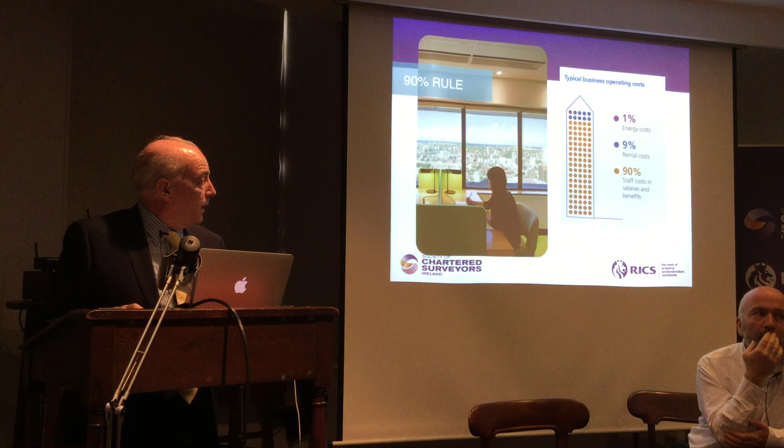One example there is that 90% of the expenses in running a business, particularly an office building, for example, are related to staff costs, salaries and benefits. So if you save 10% there, it results in far better economic savings than say 10% of such energy costs.

So there's just a few interesting research findings that speak for themselves. Office workers with windows perform better, they have better night's sleep. Productivity improvements 8 to 11% are common as a result of better air quality, and a view of trees rather than concrete also results in increased productivity.

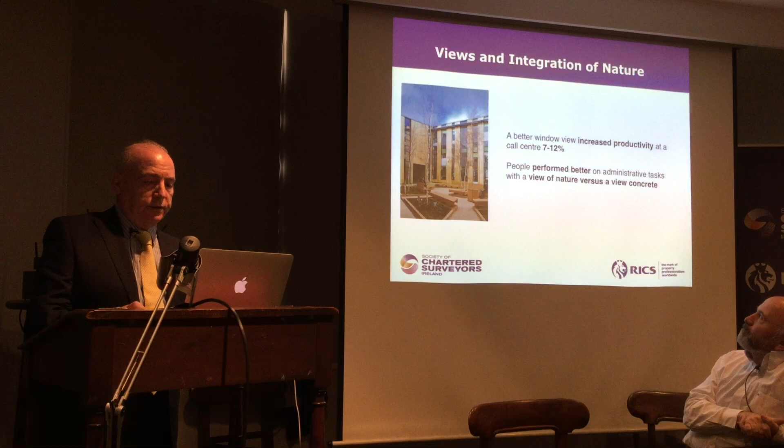So that was then summarised into basically, and this is what we're finding now in the delivery of the modern buildings that are being finished off, office buildings now that are being finished off, is that they have a higher sort of rate of delivery in terms of these under these headings.

So how to go green? Well, as we just said there, it's good for health. There is a legislative imperative now which is probably go into greater detail. So it is coming down. We're going to have to deal with it. It's sustainable. It's cost saving.

The staff productivity improvements. So I presume in time, we'll be speaking more green language terms, and also for investors there's a better return. So these are the terms that we've used, or that we've become familiar with, which again Pat will bring you up to date with more during his talk. So that's basically it.

It is my great pleasure to introduce Pat Berry. He's Chief Executive Officer of the Irish Green Building Council, which he co-founded in 2010. He is an architect with over 20 years of experience in Ireland, Europe and South America. He has a Master's in Environmental Design of Buildings from the University of Cardiff and is a qualified passive house DGNB consultant. So it's a great pleasure to be here.

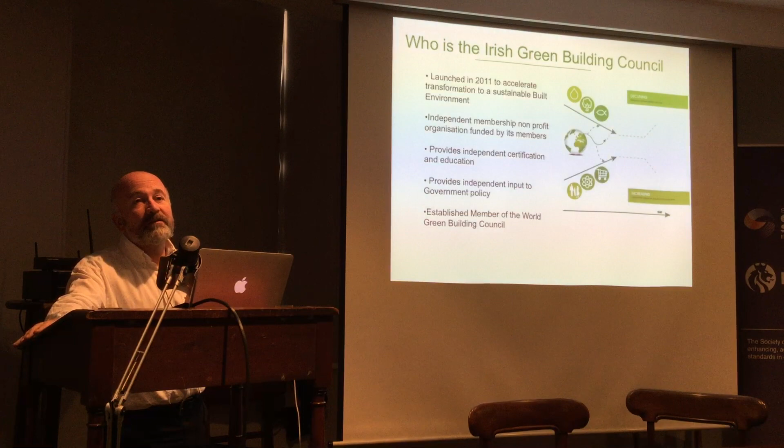I'm just going to give you a brief introduction to the Irish Green Building Council. We launched in 2011, and we're a membership organisation. Our intent was really to provide metrics for the construction industry to measure sustainability. So we provide independent certification, we provide independent input into government policy around things like helping develop the national renovation strategy, and we're an established member of the World Green Building Council, which is a network of green building councils around the world.

So you'll have heard of the US Green Building Council, UK Green Building Council, Australia. They're all very influential in their own markets, and they each do slightly different things. The UK Green Building Council will be more focused on policy intervention and education. The US Green Building Council is fully focused on its LEED rating system. Similarly, Australia will be very focused on their Green Star rating system. We do a bit of both. We do a bit of all of those things, because in a small country, we only have one organisation that's focused on green building.

We've a very broad membership, which takes in everybody from larger developers, the likes of Hammerson, or building owners like Google, right through all of the professional organisations, the RIAI, the Society of Chartered Surveyors. So pretty much everybody in the entire value chain is involved with the Green Building Council. And we're always looking for new members, by the way, to help us do what we do.

We're fully funded by our members, and with that funding we're able to go on then and apply for funding to do other projects like build upon or develop rating systems. So what we're going to talk about today is only a small subset of what we do.

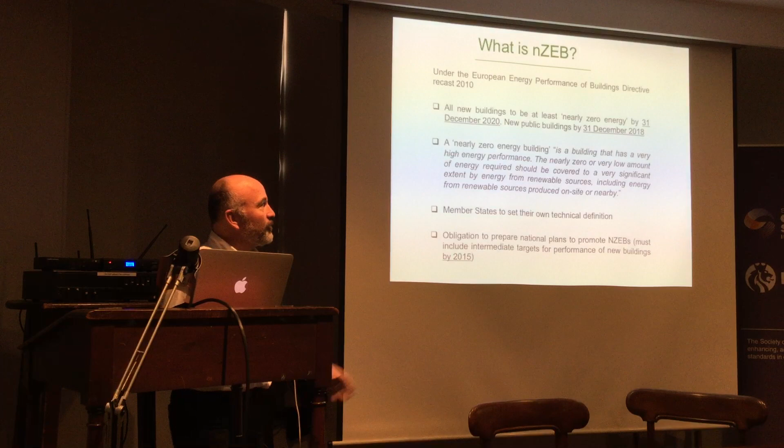It comes from the Energy Performance of Buildings Directive. The Energy Performance of Building Directive is that great directive that keeps on giving. It gave us the BERs. It was recast in 2010, and in 2010 it introduced the requirement that all member states should, by end of 2020, have all their new buildings be nearly zero energy buildings.

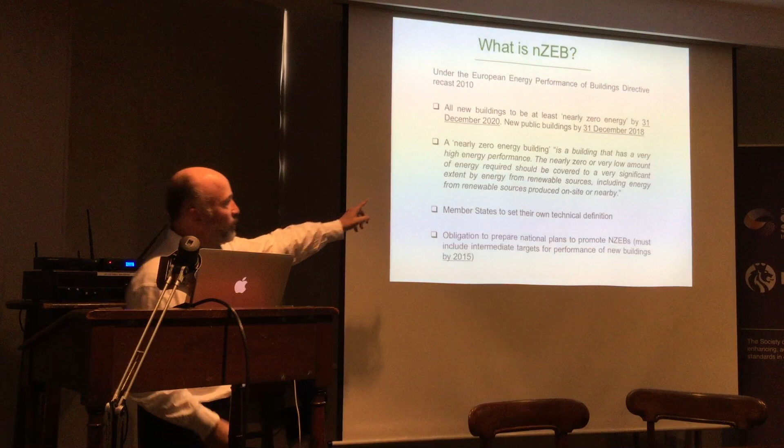So a nearly zero energy building is a building that has a very high energy performance, the nearly zero or very low amount of energy that still is required to meet for building function. A substantial part, a very significant extent of that energy should be met by renewable sources, including energy from renewable sources produced on site or nearby, and that's very important. So that's the definition of what NZEB is. Key things are very high energy performance and renewable sources produced on site or nearby.

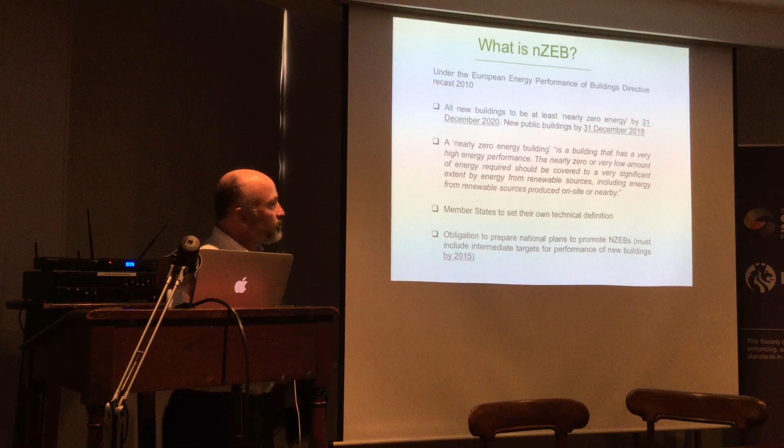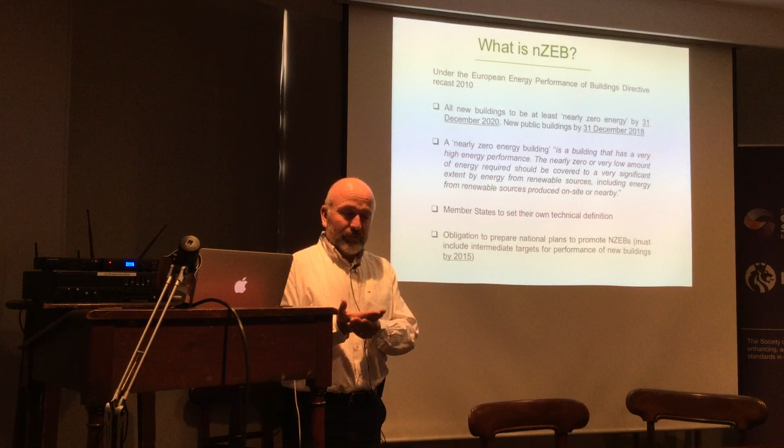Now the rub is that every member state gets to implement that in their own way, and that's where NZEB comes into play. What does NZEB mean? So each country defines what NZEB is. The European Commission has issued guidelines on what NZEB should mean for the different climatic zones.

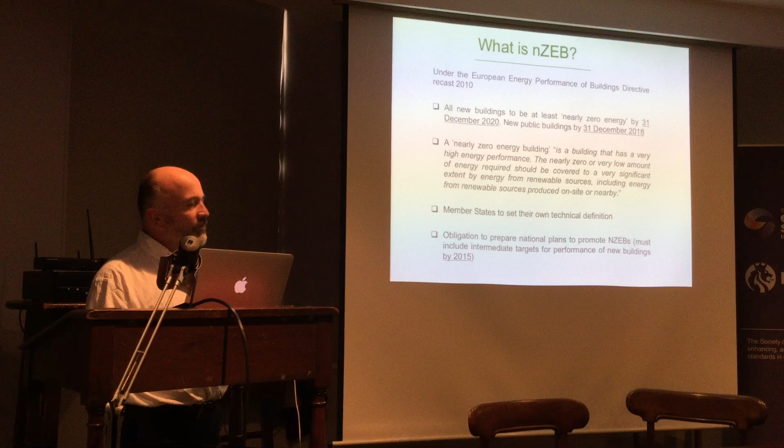So Ireland is in the oceanic climate zone, and they have suggested figures that are probably considerably lower than what the Irish government is proposing. But just to give you a little bit of the history of where we're at the moment, currently, the energy performance of buildings in Ireland is defined by Part L of building regulations.

There's two parts, two Part Ls. There's Part L for dwellings, and there's Part L for buildings other than dwellings. For dwellings, they were updated twice, in 2008 and 2011. The Green Party were in power at the time, and they really drove the agenda on energy efficiency for dwellings, so they got updated twice while they were in office. So for dwellings, energy efficiency was brought to quite a high level by 2011. But of course, we'd stopped building in 2008, so we didn't really see the impact of those changes until now.

So currently, we're operating under 2011 - sorry, I've jumped down to this one - under Part L 2011, which is quite a good standard. It's not a bad standard. Compared with the rest of Europe, we're way ahead of, say, Northern Ireland. Even further ahead of the UK. So we're not bad. So to get to NZEB for dwellings, it's not a huge leap.

For non-residential, it's a completely different story. Building regulations were updated in 2008, but they weren't really updated. All they introduced in 2008 was the maximum permitted energy performance coefficient, so they could introduce BERs for non-residential buildings, but it didn't really change the energy efficiency fundamentally. So they're quite far behind - they haven't been updated in 10 years.

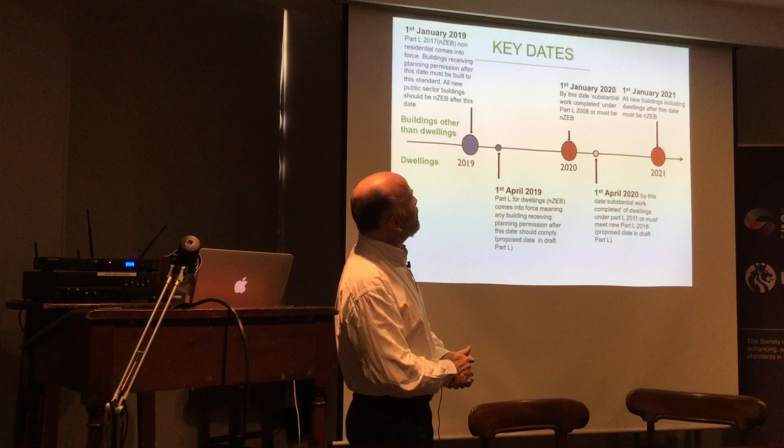And then the 1st of January 2021 is the final cut-off date. Any new building should be achieving NZEB by that date. So just be wary of those dates - I'd say there'll be a lot of builders pouring concrete over Christmas 2019. There'll be no Christmas for the construction industry, they'll all be pouring concrete.

What does substantial completion mean? Sorry, substantial work - substantial work is defined in the building regulations, it's a little bit vague. Substantial work being completed means the structure of the external walls has been erected. I think that means up to wall plate level at whatever the highest level of the building is. So that's quite a key thing. Any questions, or do you want to keep the questions till the end?

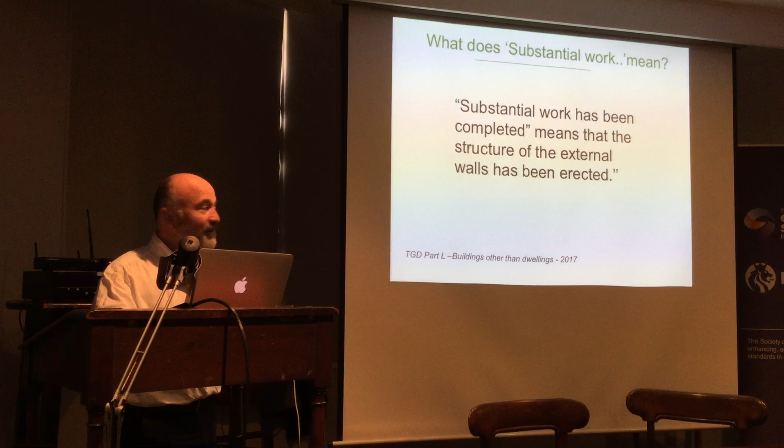So what are the main changes? Now, it's a lot to take in if you're not familiar with the changes. I'm dealing with both non-residential and with dwellings.

So for non-residential, it's not really hugely ambitious. When we heard the term 'nearly zero' back in 2010, that sounded very exciting. But after it's gone through several iterations and cost optimality studies, the actual implementation of it is not that far ahead of what good practice already is.

So it's equivalent to a 50 to 60% improvement over the current building regulations. Now that varies slightly because you've a lot of non-residential, could be anything - a school, hospital, office building. For an office building, I think it's around about 60%. For hospital buildings, it's probably a good bit less.

And remember, it also defines subgroups within office buildings. We have air-conditioned buildings treated slightly differently to naturally ventilated buildings. So air-conditioned buildings and hotels versus naturally ventilated hotels - air-conditioned buildings are allowed a slightly higher energy usage than naturally ventilated buildings, which doesn't really make sense.

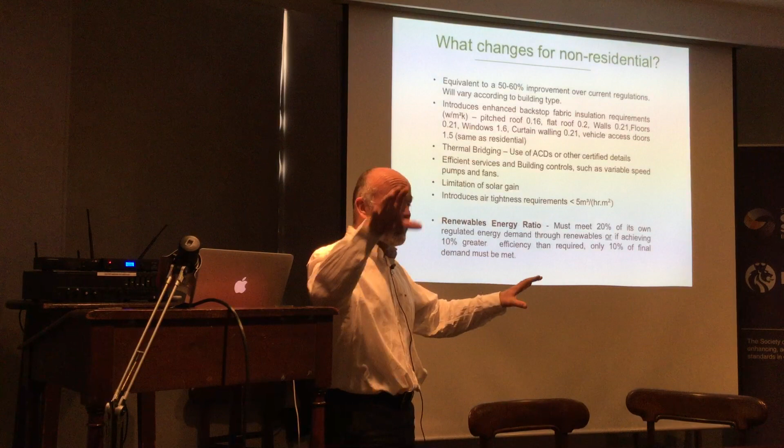It introduces a requirement for a limitation on solar gain, and it introduces an air tightness requirement of 5 cubic meters per hour per square meter, at 50 pascals. Again, that's not hugely ambitious. I'd say most schools would have been achieving under 3, and it can be a little bit more complex for buildings like hospitals, big complex buildings, to do air tightness tests. But 5 isn't terribly ambitious.

It's not hugely difficult. So there's nothing in here that really frightens the horses. The only thing that was really concerning at the consultation, the main thing that was causing concern, appeared to be the renewable energy ratio. Now, the renewable energy ratio is the part that complies with the European Commission's requirement for a significant part of the energy to be met with renewables.

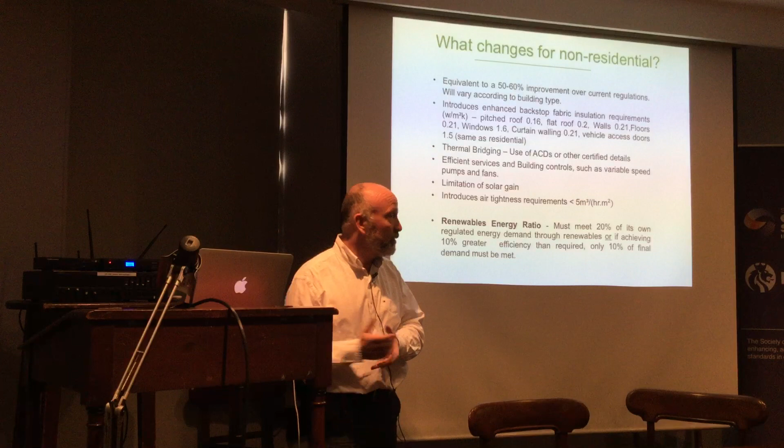So initially they set it at 20% of the final demand, of the final regulated demand. So when we're talking about building regulations, they regulate all of the fixed energy within the building - things like lighting, heating, pumps and fans. But it doesn't regulate the equipment. If you have computers, servers or data centers, it doesn't count - they're more process loads, so they're not counted within the building regulations. So it's only talking about the fixed energy loads or regulated energy loads.

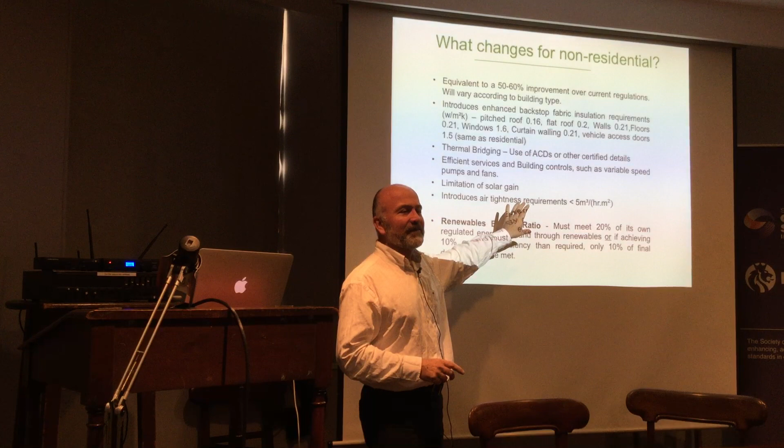So there was quite a lot - 20% didn't appear massively ambitious, it didn't appear to us like a significant amount of the energy demand. But even at 20%, there was a lot of pushback. So as a result of that, and there's certain advantages to it, they said, well, what if you make your building even more efficient - could we not count that as renewables? And that's what they agreed to do.

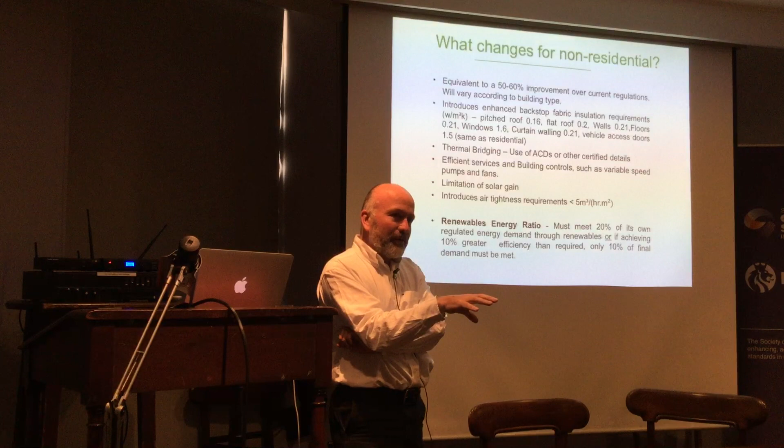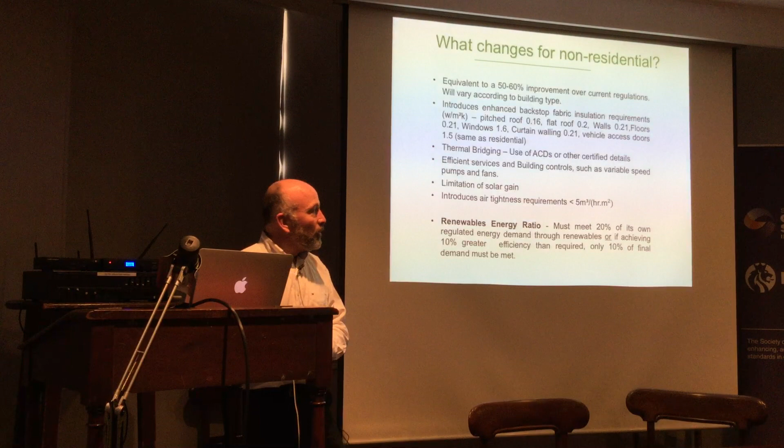So generally under the building regulations, under NZEB, you're required to be 60% better than current building regulations, and then you have to meet 20% of that with renewables. But if you go to say 70% better, then you only have to provide 10% of the final demand through renewables. I suppose the key concern was for large inner city developments in tight urban developments - how do you get all of that, say PV on the roof, if it's a 20-story building, how could you meet that 20%? So you can meet it by getting 10% better again, and then you only have to meet 10% improvement.

For dwellings, as I said, dwellings don't have as far to go - they really only have to improve by 10%. Now that would be a bit of a stretch goal for a lot of people who are struggling to meet the current building regulations. And going 10% better again, the low-hanging fruit is now gone, so you're trying to get that additional 10%. It's actually quite tough. So while it doesn't seem like a lot, that extra 10% does make it quite tough.

So now I've introduced this crazy term, maximum permitted energy performance coefficient. That's just a very complicated way of saying that.

So the maximum permitted energy performance coefficient is 0.3. That just means the building has to perform 70% better than the baseline. I'm going to explain all of this in the next slide. The baseline was 2006 for dwellings Part L.

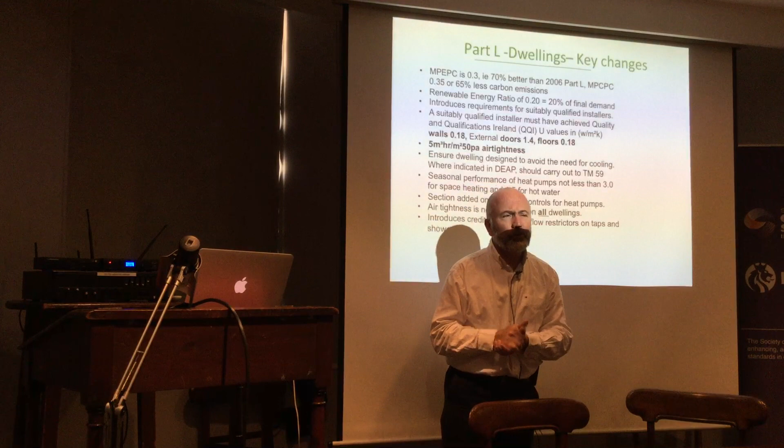The renewables energy ratio—they've introduced the renewable energy ratio now into dwellings under the current building regulations. On the current building regulations, it's a flat figure you have to meet: 10 kilowatt hours per square meter, which doesn't really make sense, because if you make your building really efficient, you might not have a need for that much renewables.

So what they've done is introduced a renewable energy ratio for dwellings as well, and it's a far more sensible way of doing it. That means if you make your house hyper efficient, you don't have to spend much on your renewables, because you get your demand down to a very small amount. Your renewables can be quite small as well, and that's the cost efficient way of meeting the requirement.

The air tightness has gone down from 7 to 5, but the rub is you have to do it on every dwelling now—not just 1 in 4 or a sample, as under the current building regulations. From our experience, most house builders already test every house. Well, any of the houses we are certifying under Home Performance Index, the developers test every house. They're probably just the better end of the developers.

It introduces requirements around overheating, because this is the big issue that's going to really crop up. We're already getting evidence of overheating under the current building regulations, and that'll get worse as air tightness and insulation requirements improve. We will have problems with overheating, so now they're requiring overheating assessment.

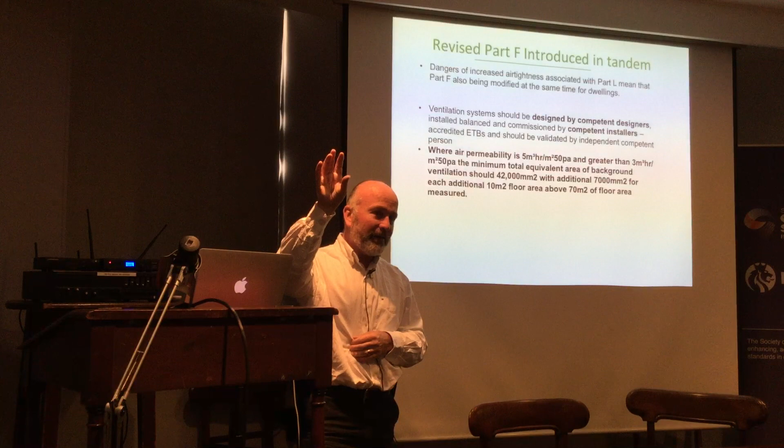Because the air tightness is going from 7 down to 5, you're still allowed to use background ventilation, but the rub is, if your air permeability is 5 metre cubed or greater than 3 metre cubed, you can still use hole-in-the-wall type vents or hole-in-the-wall overrun fans, but you have to increase the area of them, which is complete nonsense really, because you've got a more airtight building and then you have to make bigger holes. It's equivalent, I think, of 2 holes in each bedroom, 2 100mm diameter holes in each bedroom.

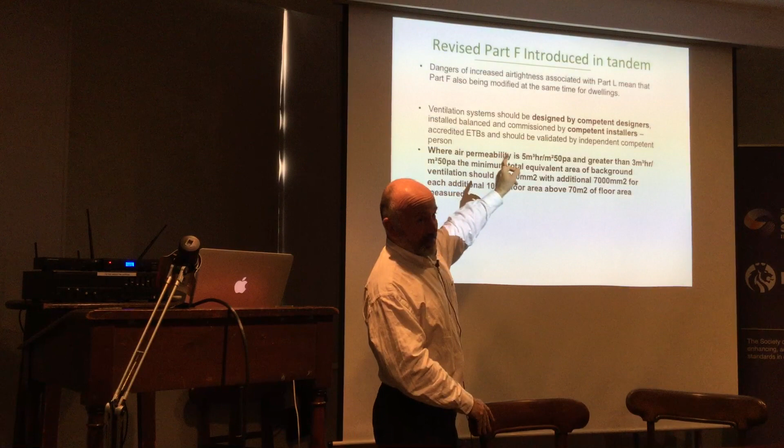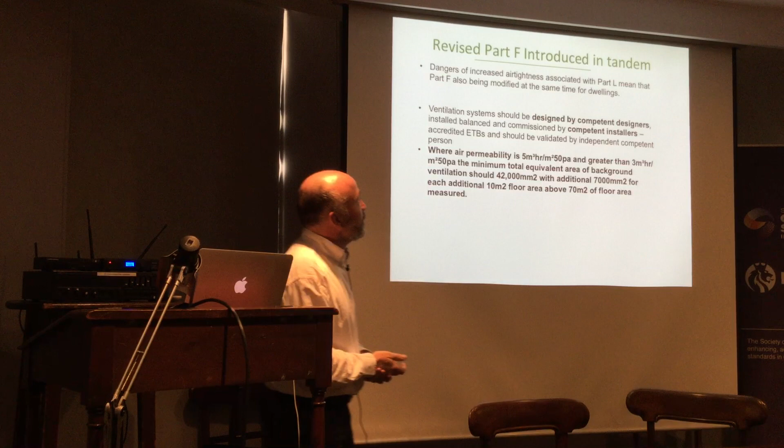Well, the evidence in the UK is that they just get somebody with a Stanley knife standing there slashing the air tightness membrane until the reading goes up to 3.1. That's complete nonsense—so we end up with 2 levels of quality. We have been quite forceful in our consultation on this. There can only be one level, only one way of doing it, otherwise this is going to introduce 2 levels of quality within the whole construction industry.

So that's just a summary of the new values for dwellings.

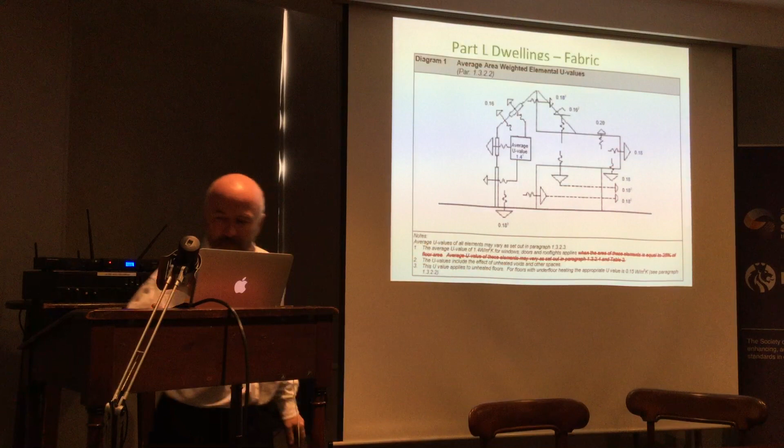Now it also introduces requirements for major renovation. Where 25% of the surface area of the building envelope undergoes renovation, then the energy performance of the whole building should be improved to the cost optimal level, insofar as it is technically, functionally, and economically feasible.

There's quite a lot of get-outs within that statement, and another thing to say is that a lot of the new building regulations, the improvements in the building regulations, were largely based on a cost optimality study. What cost optimality means is that over the lifetime, the money invested in the energy saving should pay for itself over the lifetime of the building.

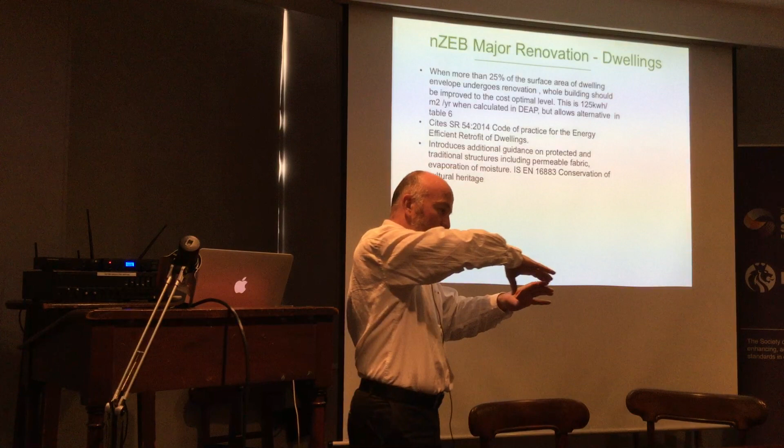So if you were renovating, say, your house, and you do work to more than 25% of the whole envelope - say the entire back wall and the front wall, you're putting on external insulation, or you're doing a massive extension, a wraparound extension where you wrap it around two walls, let's say in a semi-detached house, around the front and side - you probably hit 25%. But then you would have to bring the whole house up to a cost optimal level of energy efficiency.

Now, it sounds more onerous than it probably actually is, because they've given a list of things you should do, like changing the boiler, improving the attic insulation. So you probably get away with just doing a couple of relatively minor measures. But it does mean that you have to be aware for extensions - you can quite quickly get up to a 25% renovation of the area of the house.

Then your client needs to be aware that they need to do other work to the rest of the house to improve to the cost optimal level of energy efficiency. Now this is all set out in Part L, so I won't go through it in immense detail. It also allows, because we must be aware that we can't necessarily treat all houses in the same way when we're renovating.

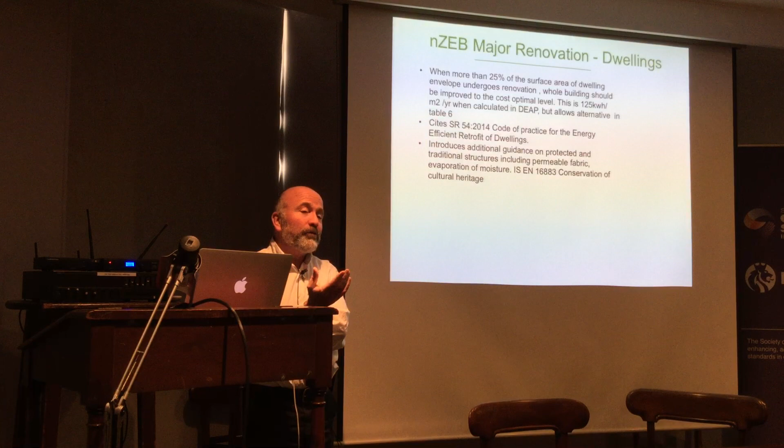Some of them are older structures, they have solid brick facades, and we have to be careful that we don't carry out insulation measures to those walls that could lead to damp problems or condensation problems. So there is allowance, where it's an older, historic, or traditionally built structure, that we should be looking at appropriate means of insulating those.

Now I'm just going to cover how do we get a cost-effective NZEB strategy. There's 3 steps to this. First of all, you need your architect, from the very first point he puts pen to paper, to be aware of what he's doing. The very first sketches are the things that are going to have the biggest impact on reducing or improving energy efficiency.

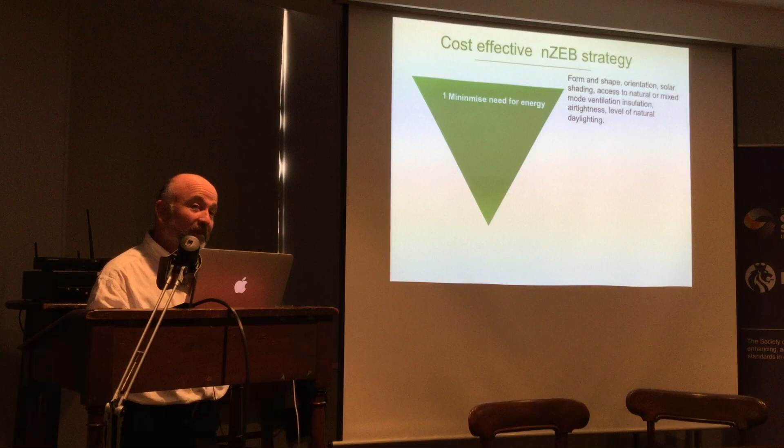It's the form, the shape, controlling solar gain - controlling solar gain for non-residential, and maybe allowing for solar gain for some dwellings, controlled solar gain for dwellings as well. Whether it can be mixed mode or natural ventilation, that's a big decision that's going to have a big impact. And levels of natural daylight - lighting is quite a significant percentage of your overall energy costs, particularly in office buildings. So once you've got that, that's the biggest step, that will reduce your energy demand very significantly, it'll have a huge impact.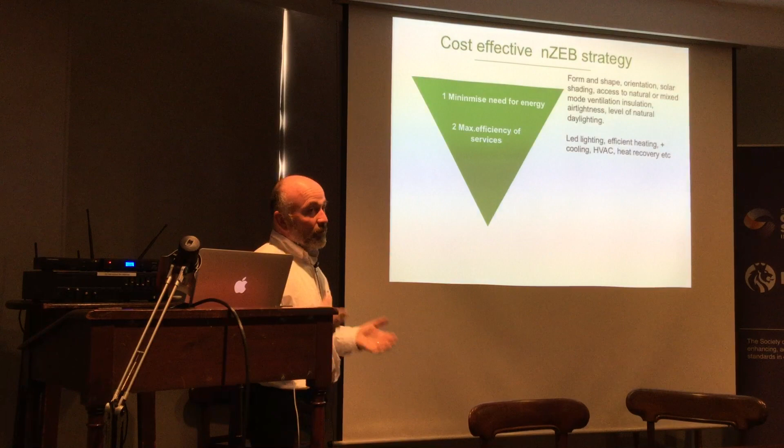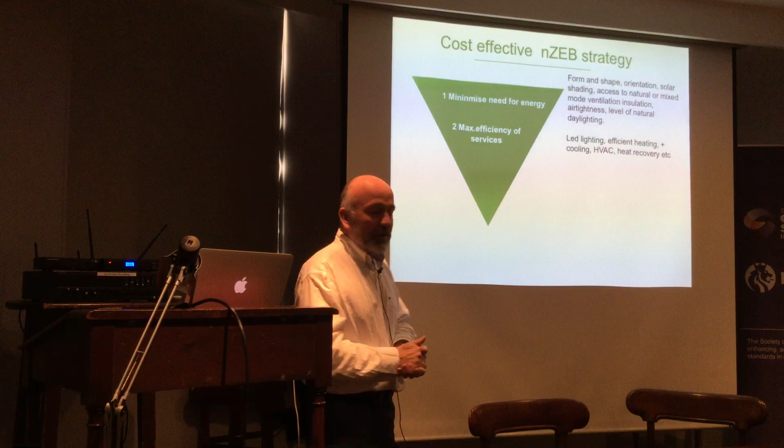Next thing, whatever services you do put in have to be the most energy efficient services that you can put in - LED lighting, heat recovery, or very efficient variable speed pumps for HVAC. Just the most energy efficient stuff that you can put in.

And then if you do steps 1 and 2, step 3 should be relatively easy, because you've cut your energy demand by these first 2 steps, and therefore step 3 isn't so tough. Now there was a bit of lobbying at the time, I understand, about whether foreign direct investment would be able to move - there's a certain type of client that has a standard specification they want to use in Texas and in Dublin, and there's a concern about how, with a highly air-conditioned office, you can meet the requirements.

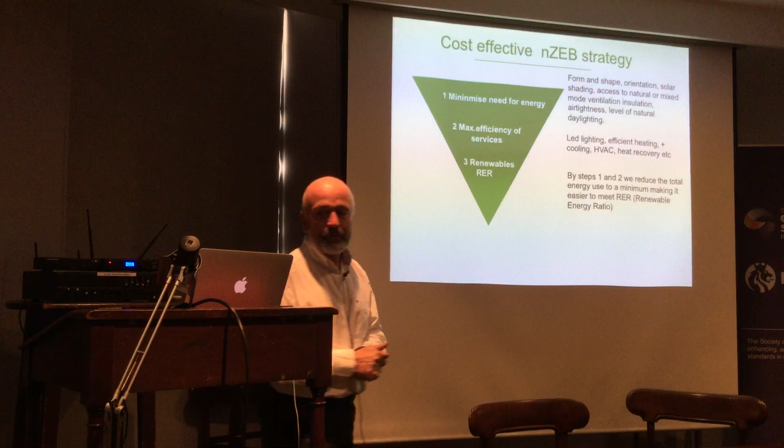At least this is beginning to focus their minds. If you want to go for that type of building, you'll end up with a lot more renewables than if you go for a more engineered, mixed mode type of office building. But the key thing is the architect needs to be aware of what he's doing, that he can't just plaster the entire building in glass and then expect the building services engineer to work it out afterwards.

This is a really boring slide, we'll have to get through it. So how is compliance demonstrated?

Well, dwellings use DEAP, the compliance software, which is the Dwelling Energy Assessment Procedure. That's what's used to create the BER. And effectively what it does is...

Non-residential buildings use NEAP, the Non-Residential Energy Assessment Procedure. It's usually applied in Ireland through a program called SBEM, which is a very crude Excel sheet. Well, it's not an Excel sheet, but it's basically based on Excel. It's called Simplified Building Energy Modeling.

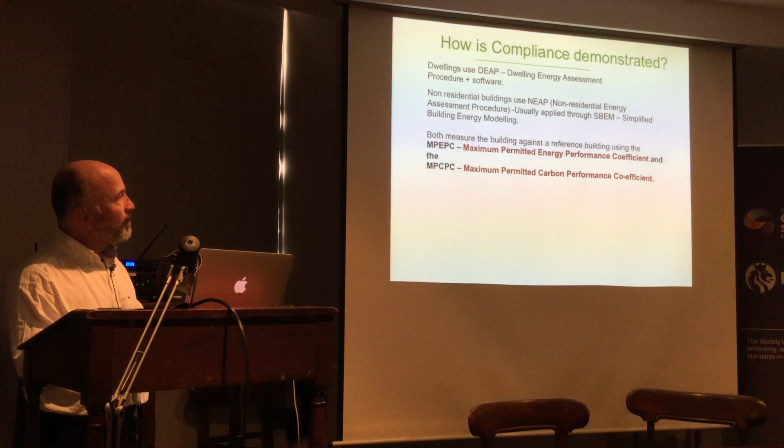Now, this is where we come to the maximum permitted energy performance coefficient. So both dwellings and non-residential buildings have to meet the maximum permitted energy performance coefficient and the maximum permitted carbon performance coefficient.

That sounds very complicated, but all it means is there's a coefficient for dwellings under NZEB of 0.3, which means it has to be 0.3 of what the energy use under Part L 2006 was. So in 2006, it's measured against the 2006 regulations - that's the type of home we built during the boom. So dwellings under NZEB should use 0.3 of the energy that those homes used, as measured within this software.

Essentially what you're doing is putting all of the specification into your DEAP software - the area of wall, the area of windows, the orientation, the U-values, the air tightness, all of that. You put that into your software, and the software does two calculations. It calculates how much energy that building would have used in 2006, and how much with your NZEB specification - the enhanced specification you put in for the new dwelling. It works out, are you 70% better? And have you met all of the backstop?

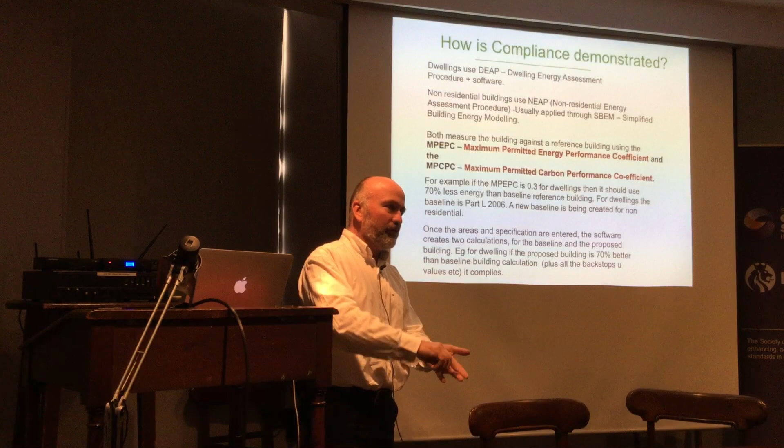Have you met all of the U-values? So you put the U-values for the windows in, the U-values for the walls, all of that - it ticks all of those, they're fine. But if it doesn't meet 70% better than that same building measured in 2006, it's a fail, it's a cross, which means non-compliance. That's what it looks like in the software.

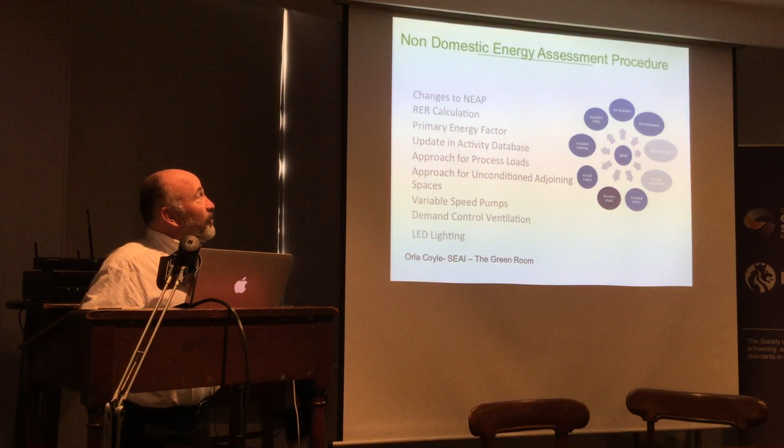Again, for the non-domestic energy assessment procedure, it's something similar. They've had a lot of fun working this out because the HSE came back and said, well, we can't meet 20% renewables because we have operating theatres that use a massive amount of energy. So there was a lot of toing and froing working out whether the energy used in the operating theatre is a fixed load or a process load - something inherent with the process that happens within hospitals. You have a huge number of air changes in an operating theatre that you wouldn't have in a normal building. So they agreed, okay, that's the process, it's not part of the fixed loads.

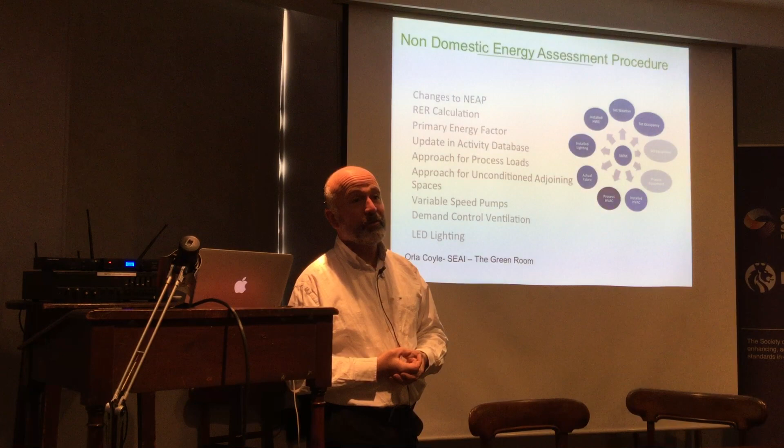So they had to work out all of these different process loads, and for data centres similarly, they had to work out different approaches for process loads for different types of buildings. They haven't updated this fully - it should be out this month, the new version of NEAP. So we probably won't know exactly what you need to meet until the end of the month when we have the revised version of NEAP and SBEM.

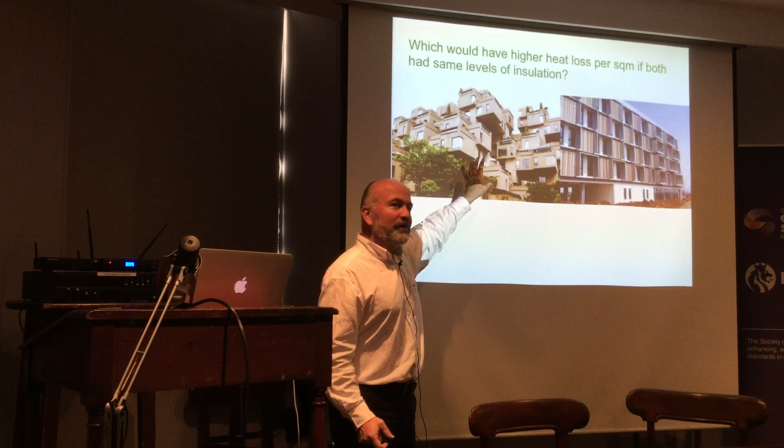I suppose just so you understand it a bit better - both of these buildings theoretically could meet NZEB, but which would use more energy? If you take this theoretically, and if you're any quantity surveyors here, you'd say, well, I would shoot the architect who did something like this - and you'd be quite right. You could meet NZEB with that, you could meet NZEB with that, but not only would this take a huge amount more, because this has such a surface area, it's got a much higher level of heat loss.

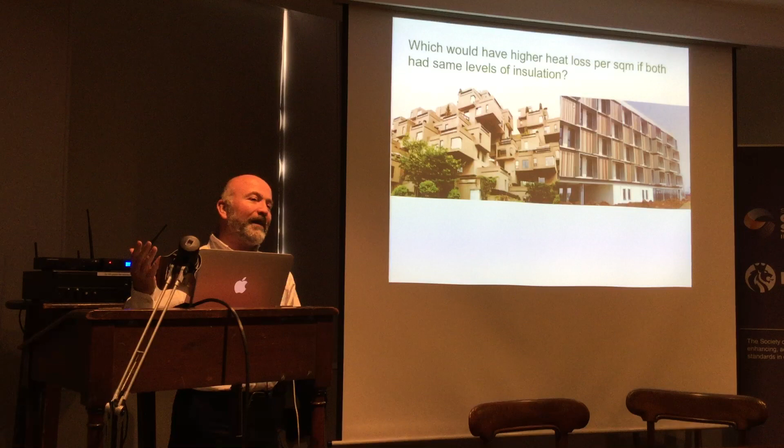So if you've got an apartment in a building like this, say it's only a single-aspect apartment, you can only lose heat through that area of wall. But this apartment is losing heat through the roof, the sides, the floor. No matter how you insulate it, there's a certain amount of heat transfer through the insulation. You're going to have to put far more insulation on this building than on this building to achieve the same result.

Not to mention, if you're required to calculate the thermal bridging, well, for this building you've only got a limited number of thermal bridges. So your thermal bridge assessor is going to become rich, but not that rich. Whereas your thermal bridge assessor here, they just give up.

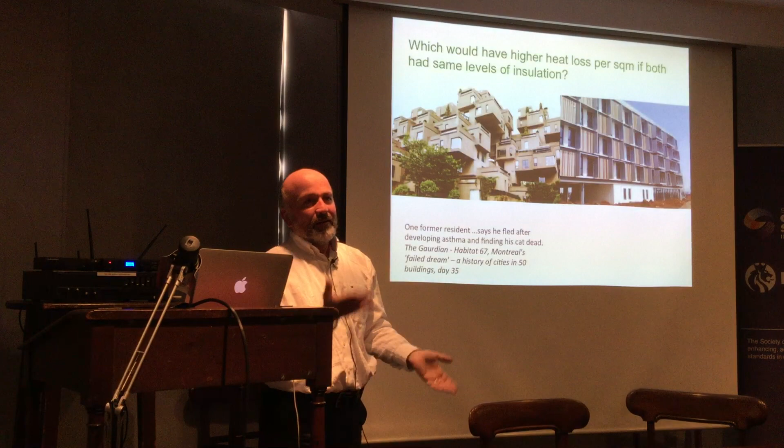And that's why it comes back to cost, achieving NZEB cost effectively. You have to think about this from the very beginning. This is going to need less insulation to achieve the same end result as something like this. It's going to require less working out of junctions, just an awful lot less work. That doesn't mean we have to go to boring architecture, it just means we have to develop a new design aesthetic.

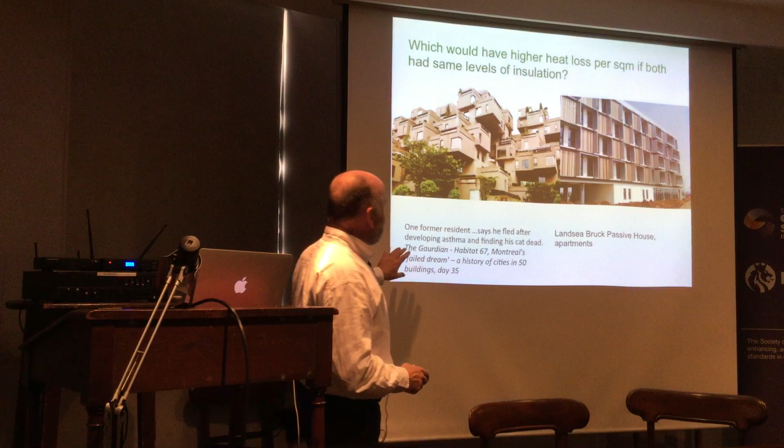So I took this from googling images representative of a building with a highly articulated surface and one without. And one former resident said he fled after developing asthma and finding his cat dead. A very interesting building, mind you. It was from the 1960s, and they were all very idealistic, but didn't really understand building physics in the same way.

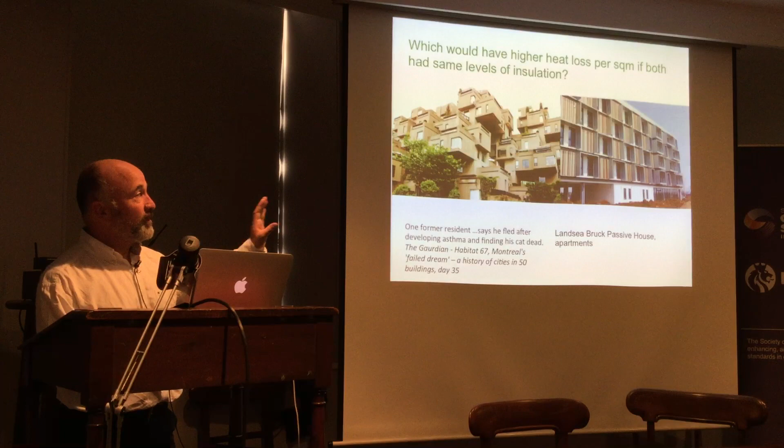So the key point in a strategy towards NZEB is just compact form, particularly for dwellings, reduce your heat loss area to a minimum. And then minimizing solar gain is a key one - solar shading, avoid as much solar gain as possible.

How much time have we got, by the way? I must be over. I shall try and finish up quickly there. You're okay for about 10 minutes.

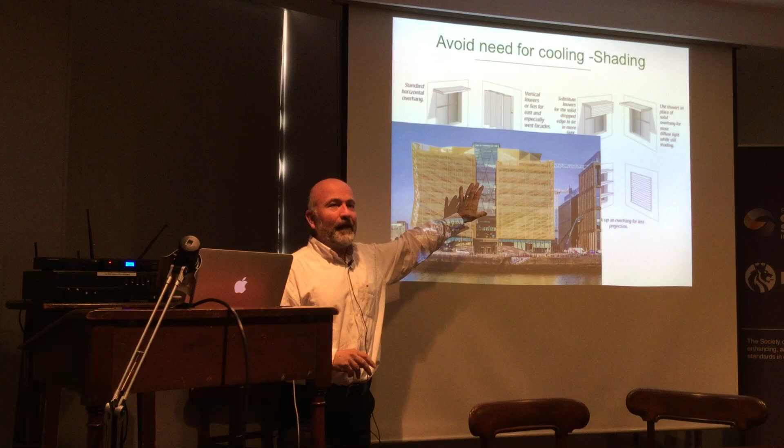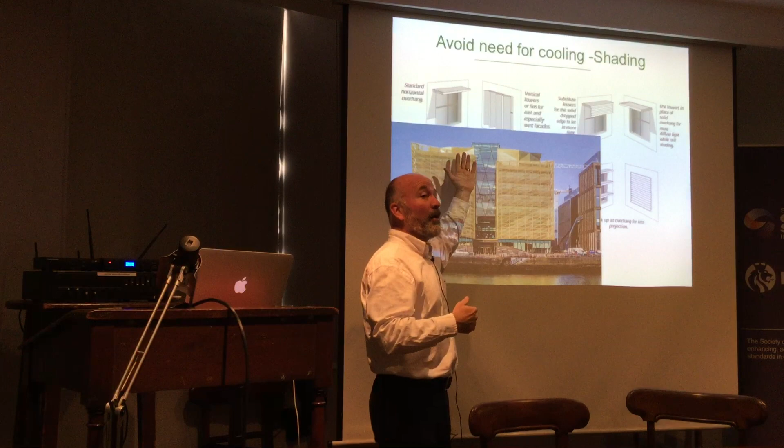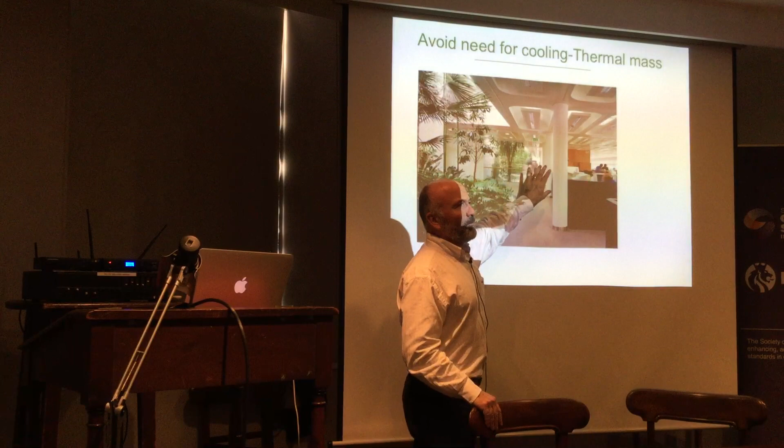This is either East Point, no, it's actually the Aircon building, and Scott Tallon Walker did this back in 1997. But they got all the basics right. You look at all Scott Tallon Walker buildings from the 1990s - they have their solar shading, they have their coffered slabs, and this was all about using thermal mass to cool the building.

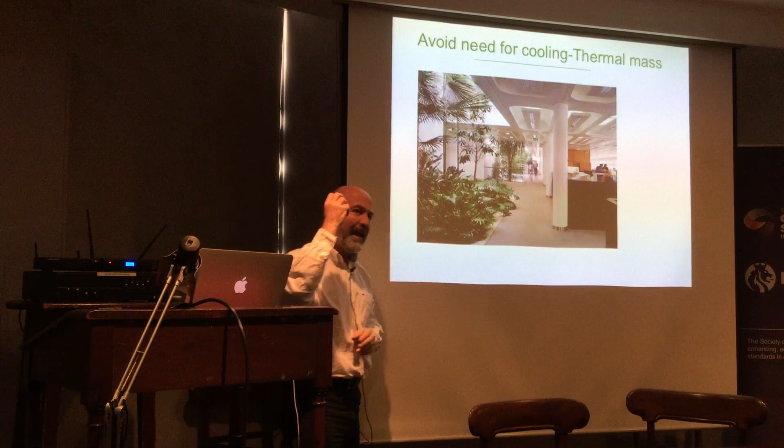Interesting thing, they did a lot of these buildings out in East Point, and it's interesting to go back now, 20 years later, and see some have been retrofitted as LEED buildings. They're fully air conditioned, and they're probably using a lot more energy than they did then. But part of this is because American multinationals want their air conditioning, and they don't understand the whole idea of having natural ventilation.

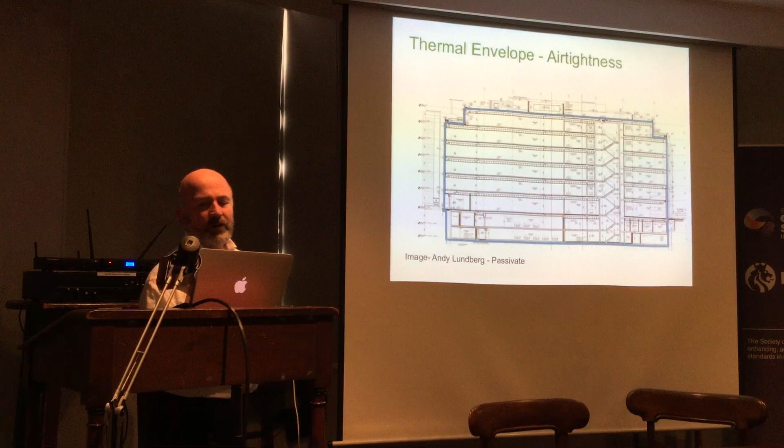Now, other things you need to be aware of - for a commercial building, it's slightly more complex with your air tightness and your thermal envelope. It's trying to define that with your architect. Like for a commercial building with basements, you really need to draw your line of where your thermal envelope is. It's not that outer line of where your basement is - you need to work out where are the heated spaces.

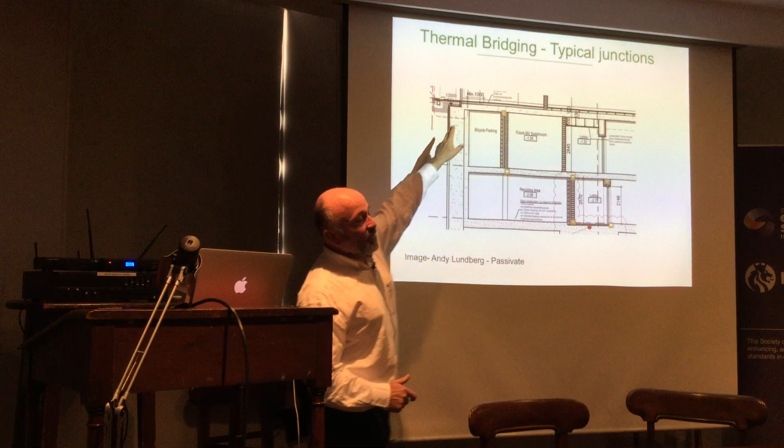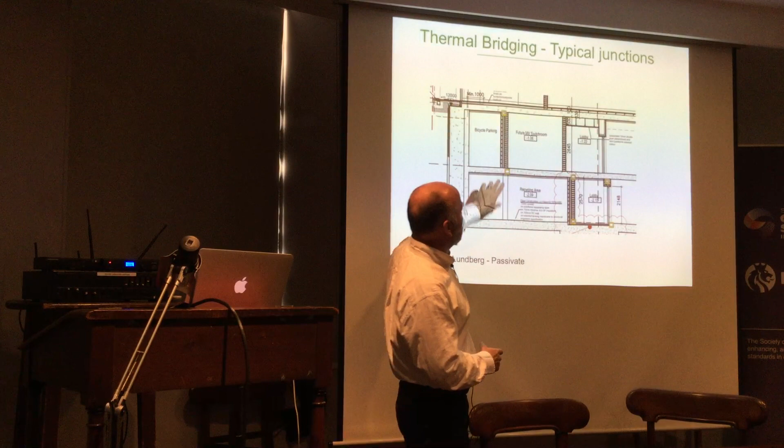And where are your thermal bridges going to occur. So typically on this, you could have thermal bridges at these different junctions in the basement, and you're trying to draw your line, so you have to look at all of these junctions. Are you familiar with thermal bridging, the whole concept? With thermal bridging, heat flows quicker through steel and through concrete than it does through insulation. That's why we insulate - we're all the time trying to work out how do we stop that thermal bridge, because that's outside the heated envelope, that's inside. So how do we avoid heat transfer?

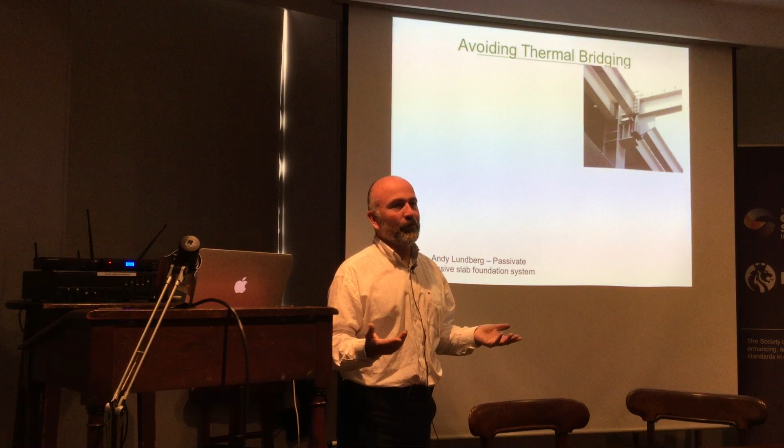And particularly for commercial buildings, there's a lot of thermal bridging issues. We understand it pretty well in dwellings, but if you're involved in just commercial buildings, you haven't had to deal with it. A lot of commercial buildings are built of steel, which makes it even more complex because steel transfers heat incredibly quickly. So you put a lump of steel through your facade, and it's like a burst balloon.

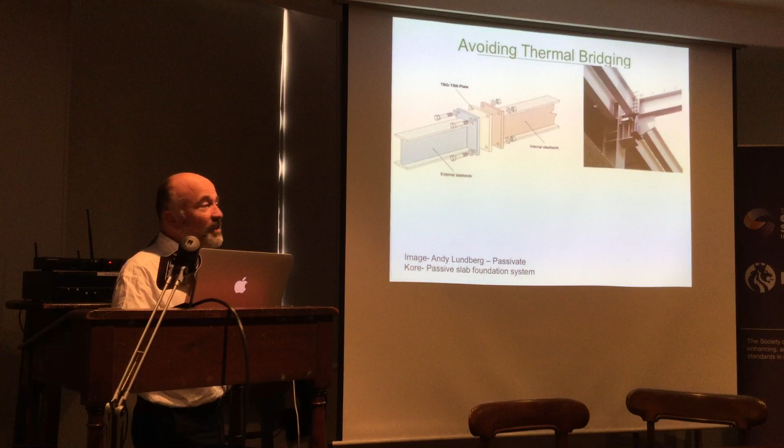That heat is going to flow very quickly through the steel to the outside. It's not so much the heat loss; it's the condensation that occurs because the steel on the inside is going to get cold, get moist, attract moisture, and you're going to get mold. So the engineers should be aware that there's ways of avoiding thermal bridging within steel structures using special connectors.

Where the steel comes down onto the basement slab, how can you minimize thermal bridging there? Now, one of the things - sometimes I'm not making an advertisement for thermal bridge assessors or anything, but it is worth investing in having a thermal bridge assessor on the design team, because I was talking with one contractor who was looking at different systems for building a nursing home or something, and he wanted to use a particular manufacturer's thermal bridge verified details.

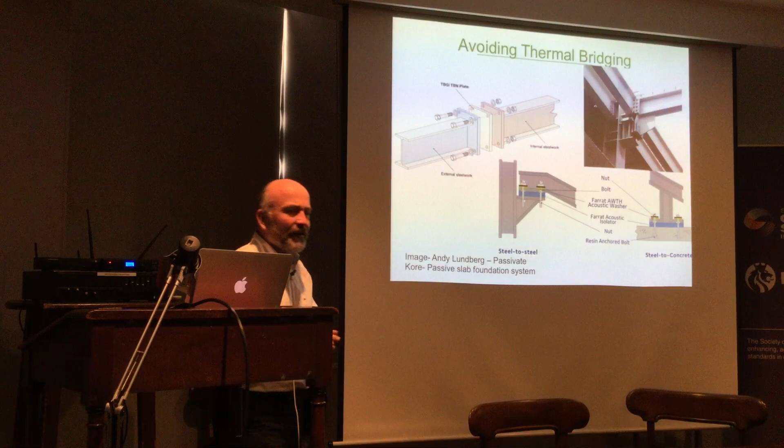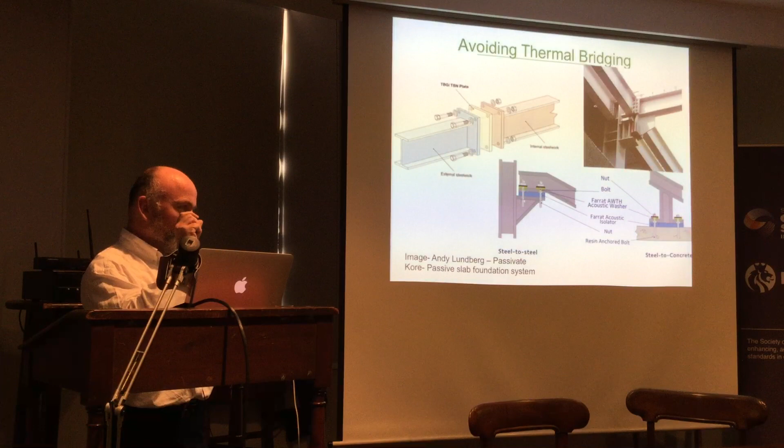But he wanted to use a mix, which meant he couldn't. And I was explaining to him, you'd probably save a lot more costs by spending a couple of thousand working out the key thermal bridges, because if you don't deal with your thermal bridges, you have to use a default in the software, which means you have to put more insulation on the entire building, or do something else, which could end up costing tens of thousands rather than spending it on calculating. If you calculate your thermal bridges, you can use the actual calculated value - it's called the Y factor within DEAP. That's why it's sometimes worth spending a few bob on a thermal bridge assessor, because it can save you a lot on optimizing your insulation elsewhere.

Again, there's details for balconies, for avoiding thermal bridges. There's more and more components available to avoid thermal bridges. For dwellings, you have thermally broken foundations - there's lots of systems for insulating the foundations.

Now, just a note on - I mentioned NZEB, we're all talking about NZEB, and you may be using LEED or BREEAM or WELL or whatever, but WELL isn't really a sustainability tool. Even if you're achieving a LEED Platinum or a BREEAM Excellent, it's no guarantee that you're achieving an NZEB building that complies, because remember, LEED is a global standard, it's not measuring against Irish building regulations, it's measuring against global standards. So you need to be careful that if you're going for a LEED building, you're also tackling NZEB.

And BREEAM is based on percentage improvement over your existing regulations. But our NZEB regulations haven't come into force yet, so you could have a BREEAM Excellent building this year or next year, but it still isn't NZEB. The only thing - if you're doing dwellings, we insist on, if you're going for goals, you must be NZEB for the dwelling to get our certification. It's a Home Performance Index.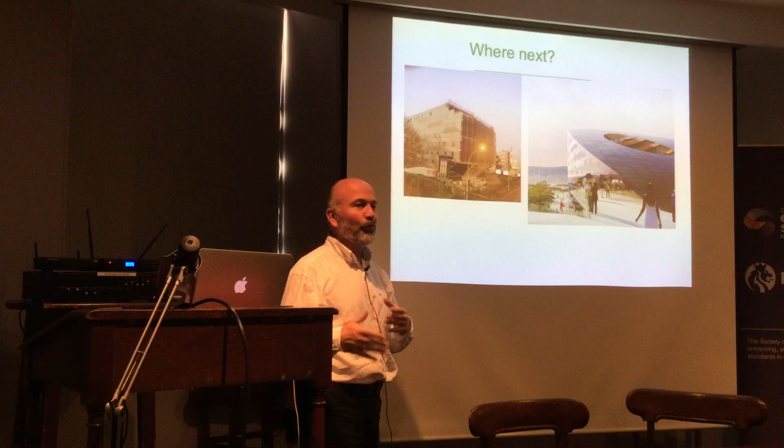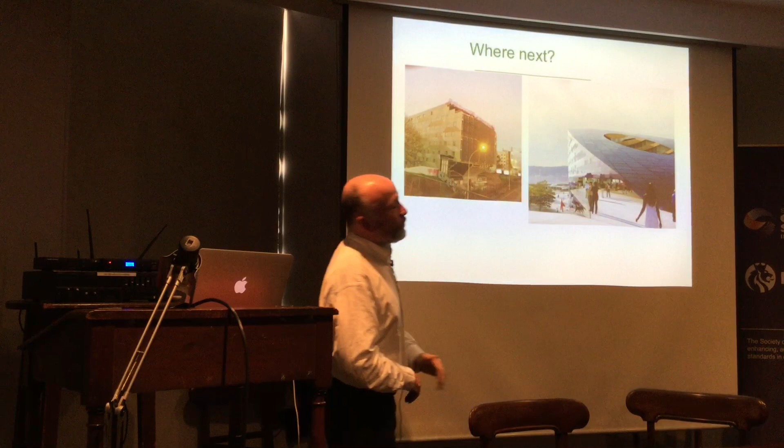This, for example, is a student accommodation building in Paris. That literally is a zero energy building. All of those are solar thermal panels that heat this massive big tank that stores the heat for a year, and they use that heat in the winter for both heating and hot water. And they have a full array on the roof for electricity.

This is a new movement in Norway that's really taken off. It's called Powerhouse, and they are moving to genuinely net zero. These are buildings that meet all of their energy needs, and it seems to be taking off in Norway.

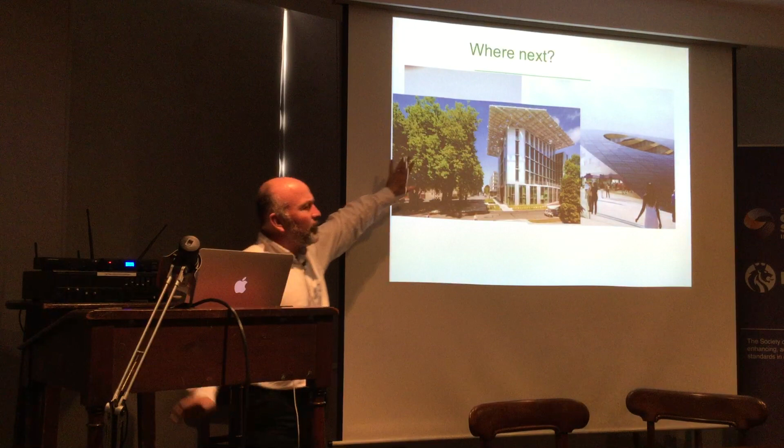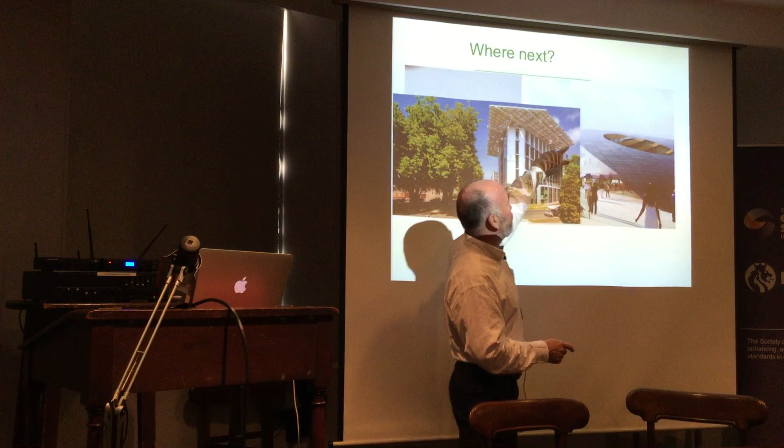We're still a long way from those levels. I don't know if you've heard of the Bullitt Center in Seattle. This building meets the Living Building Challenge, which means that at the end of the year, they look at the bills and there must be zero. It must officially have met all of its energy needs. This is the ultimate example. They reduced the energy requirement within the building as far as they possibly could, and then had to put a massive solar array on top to meet the rest of the needs. I'm not saying this is necessarily the way we should go, but in terms of the gap between NZEB and this, it's quite substantial. We're not talking about those levels of ambition with NZEB.

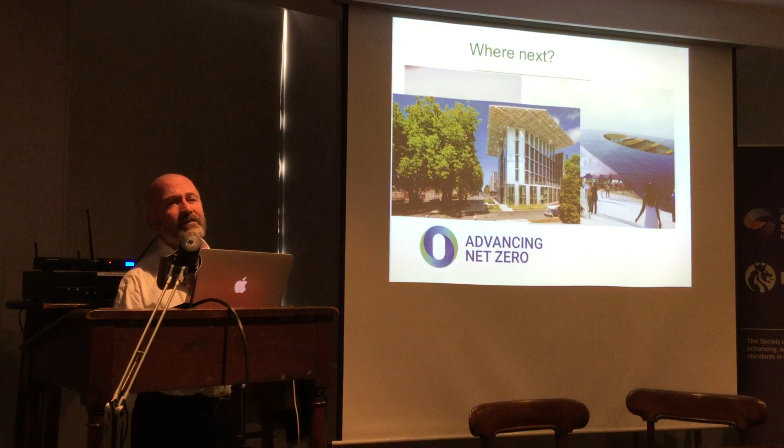We're also working with the World Green Building Council on a certification at COP 2015 in Paris. The World Green Building Council committed to introduce a net zero carbon certification, and that is now being introduced in different countries, and several cities have signed up to meeting that requirement by 2030. It's a bit like NZEB - they probably made the mistake of allowing each Green Building Council to set their own version of that. So we're trying to work now with all the European Green Building Councils to have one European definition.

The crux is, how far can we chase down energy efficiency in buildings? Because we really need to be looking at the total life cycle assessment of the building - how much carbon and energy does it take to build the buildings in the first place? In some cases, up to 50% of that carbon could have been emitted before we even occupy the building, in the materials that go into the building, and the transport. It's mainly the materials - concrete has a huge carbon footprint, but also the transport.

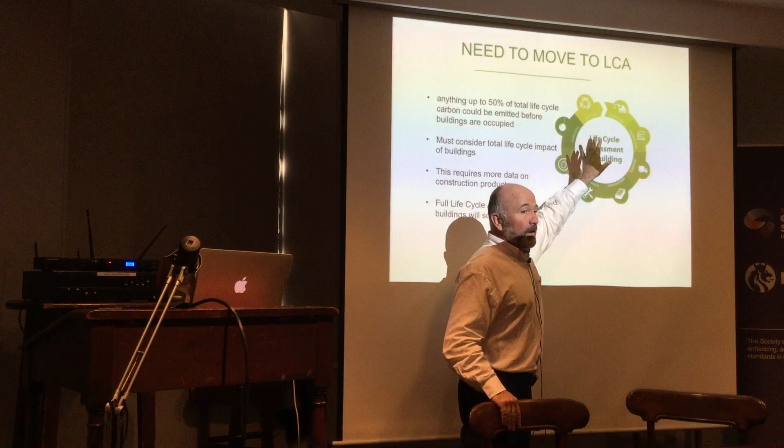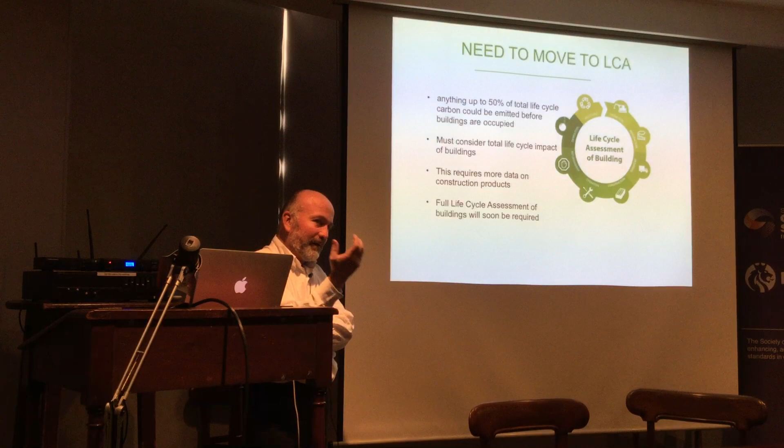So we are trying to raise awareness now of assessing the full footprint of the building throughout its entire life cycle. Take an NZEB home - it could well be an apartment building - 50% of the energy consumption, 50% of the total carbon is likely to happen, under one study by Sturgis, before it's even occupied. Which means there's no point in chasing down energy efficiency much further without dealing with the impacts of building the building. That's why we are doing a lot more work on this ourselves. We've set up an environmental product declaration program to try and get the data on products, so that architects and engineers can then calculate the actual footprint of the building.

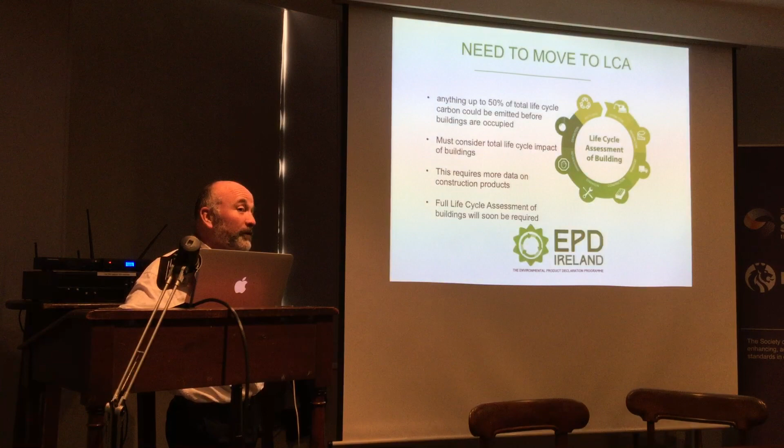That's the advancing net zero approach - we will probably take for net zero carbon buildings to include the embodied carbon. So that's where it's beginning to go. Over the next few years, you'll see regulation on embodied carbon. Holland already has that, Finland are introducing it by 2025, and a lot of other countries are likely to follow. I would imagine the European Commission will start regulating this within the next 5 years.

That's why we're starting to move to different types of construction. This is the construction of a 18-story student housing block in Vancouver. It's built entirely from cross-laminated timber - the columns, everything is built out of timber.

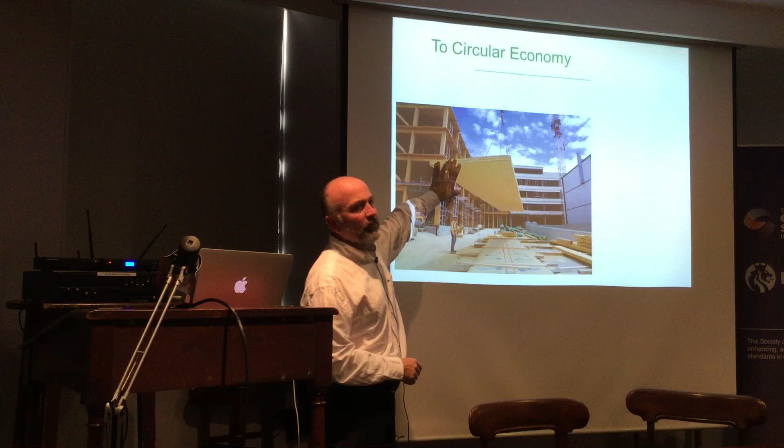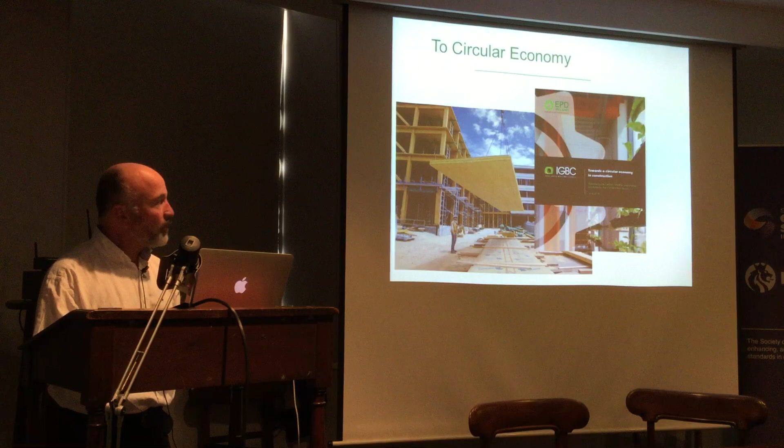We really need to start looking at the total circular economy - how do we meet all of our energy needs? How do we deal with the materials? How do we make sure that all of those materials within the buildings can be reused in the future? So that's where we're going over the next 5-10 years after NZEB.

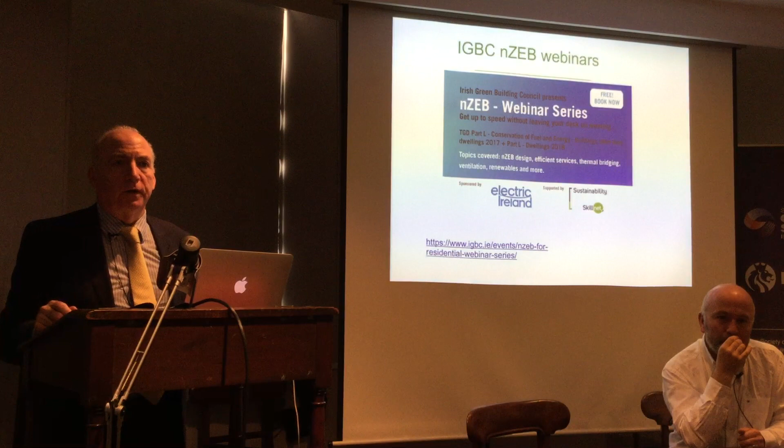That's why I mentioned that whole inverse triangle. If you work through those steps, it becomes a lot cheaper to meet the NZEB standard. The general thinking is that if you design it from the beginning, it shouldn't cost that much more, but the benefits are greater - you should attract a higher level of tenant, more rent, and cheaper overheads. So the thinking is it's a better long-term plan.

It's a good plan. What are the consequences if you don't comply with the regulation when the tests are undertaken? Can the building not be occupied, or is there a penalty? Well, it's the same - it's BCAR. There's nothing different.

All that's happening now is that the regulations have been updated. BCAR applies, so the same level of onerous compliance applies then as for now. It's just that the regulations changed - it's NZEB. I suppose NZEB is just the term, but it's really Part L now that we're talking about.

Okay, sorry, just on that - so NZEB is approved through BCAR, that's how it's working? Yeah, I mean, NZEB doesn't really - NZEB is a term introduced by the European Union, but after 2020 it's just Part L. So it's not really a term, you could use it for marketing purposes to say I'm an NZEB building because I've applied the new Part L, but it's just building regulations after 2020.

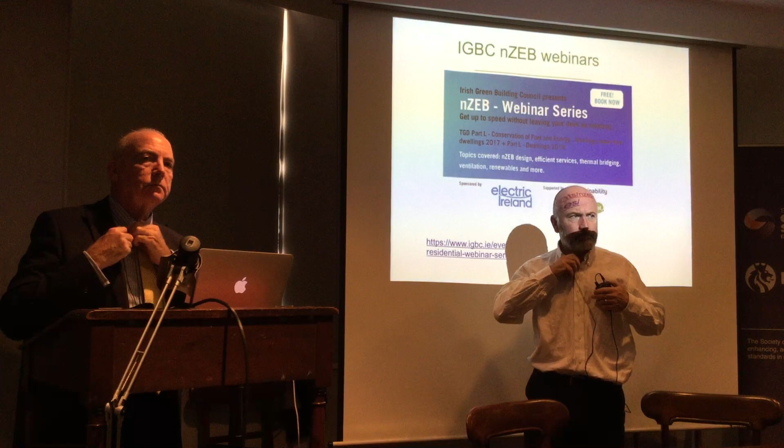That was very interesting. So now I know what the whole thing is about.